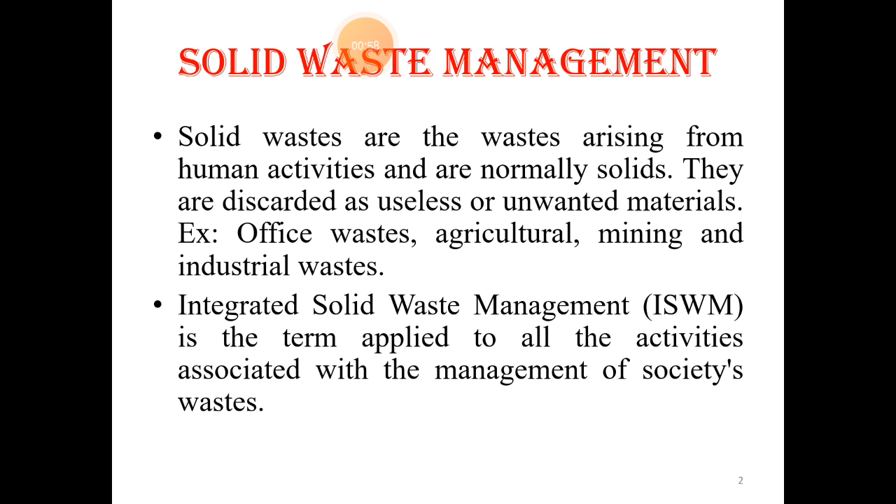In our medieval days, the discarded waste in the streets led to the breeding of vector animals like rats and fleas. This further had led to the arisal of around 22 human diseases, soil and water pollutions as well. This is a nuisance and a great threat to human life.

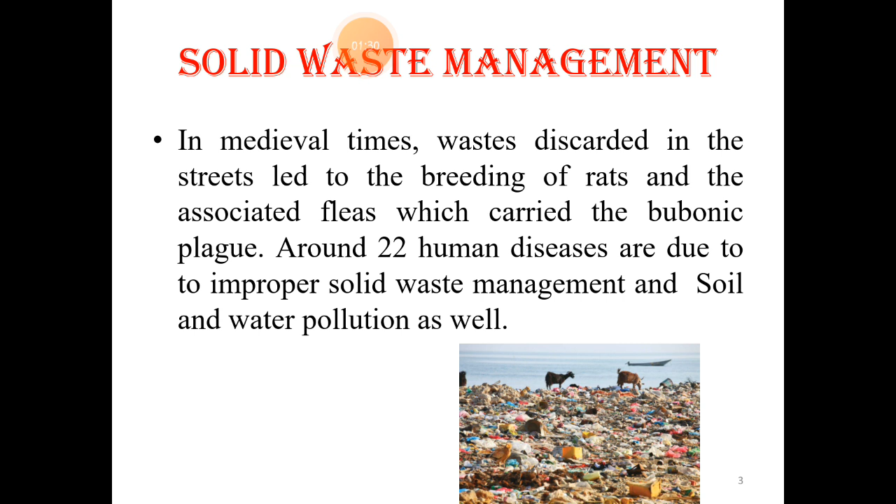Coming on to the sources of this solid waste. As we know, human activities at various places are the chief sources for the generation of solid waste. It includes domestic or residential sources such as food waste, paper waste, garden trimming, glass, waste oil, empty containers, etc.

These wastes are combustible or non-combustible. The next type of sources are commercial waste. It includes waste generated at commercial places like stores, restaurants, hotels, and even in industries.

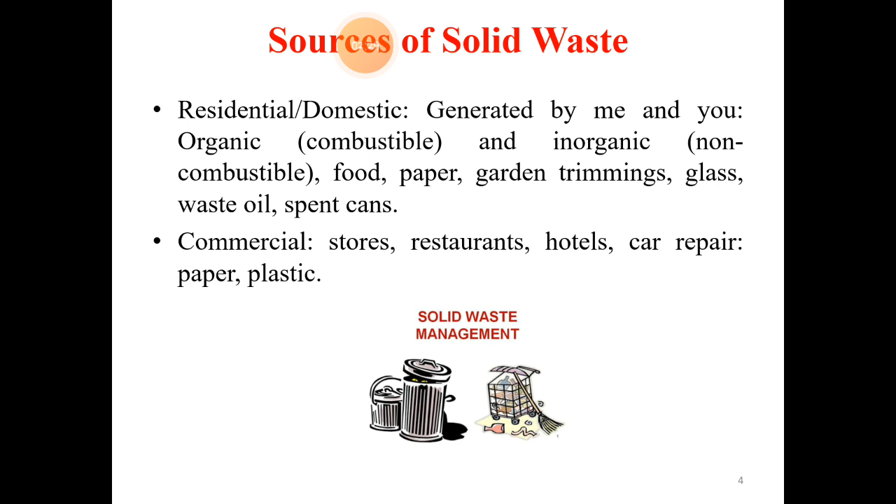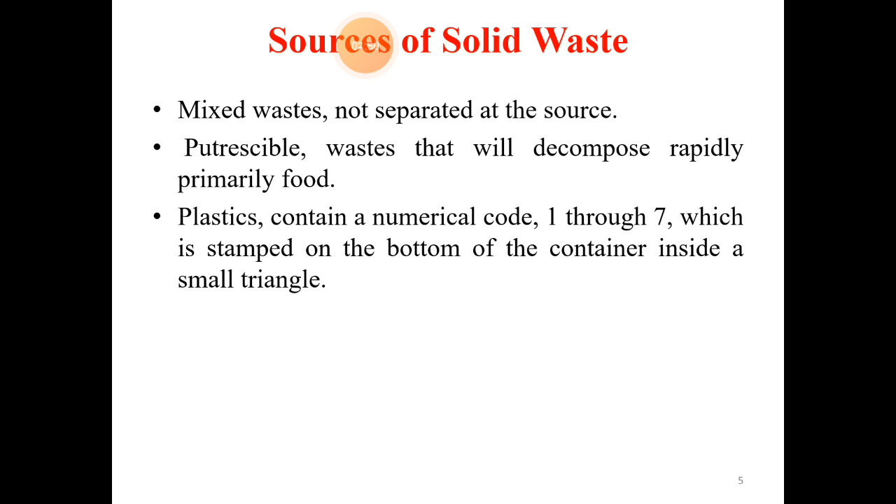The other type of solid waste include mixed waste that are not separated, putrescible waste that include food waste that are decomposable, etc. Industrial waste includes waste generated by the government buildings, industries, and institutional waste includes schools, hospitals, etc.

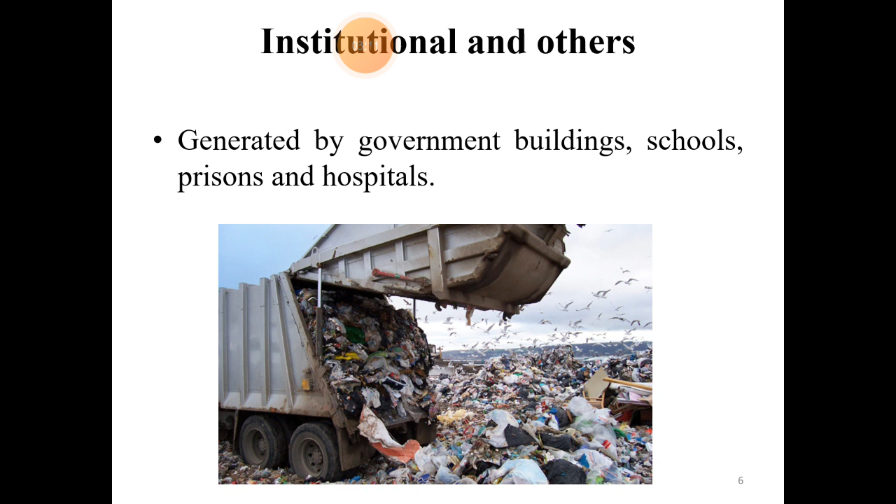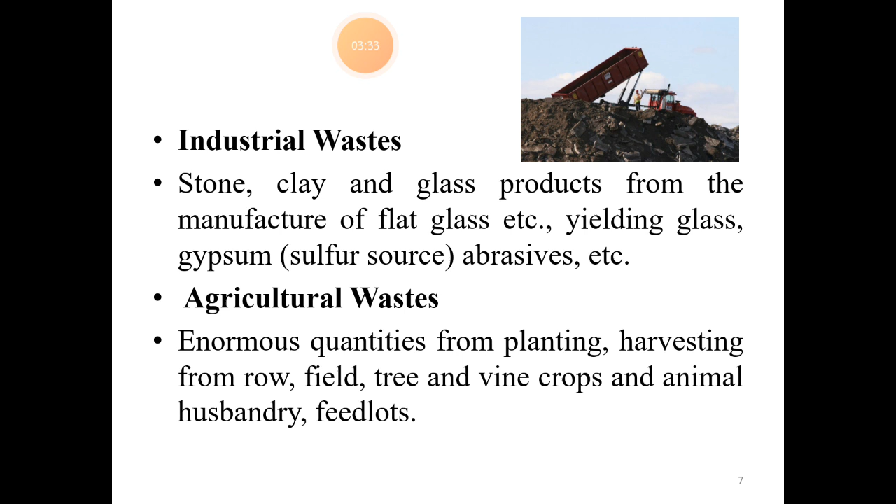The industrial waste includes stones, clay, glass products, paints, etc. Whereas the agricultural waste includes waste of the plantlets, harvest waste, then animal waste, etc.

So, the definition of solid waste management or garbage management is a scientific method of collection, transport, and processing or disposal and management of the solid waste.

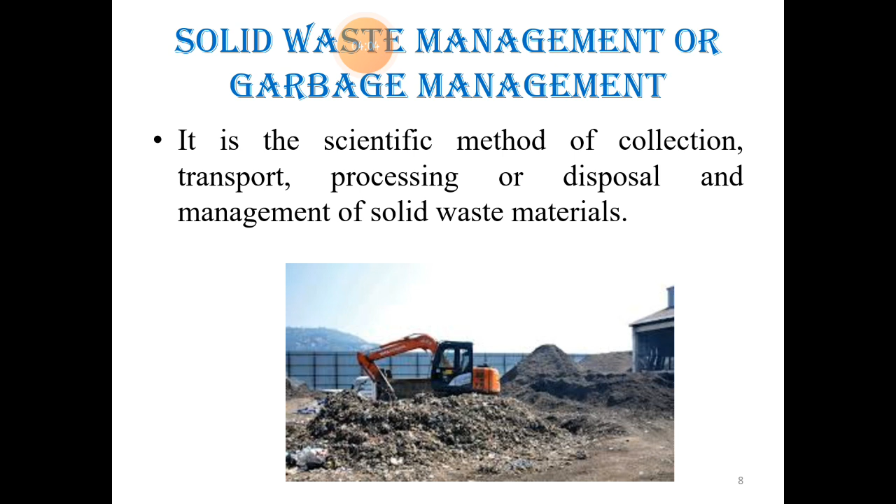Solid waste management majorly includes three scientific methods and stages. Number one, collection and transport of the waste. Number two, disposal methods. And number three, recovery stages. Students, remember, solid waste management is a scientific method where we collect the waste, transport the waste, dispose the waste, and recover the energy and resources from it.

We shall understand one by one now. Step one is collection of solid waste. It includes picking up of solid waste from the sources, handling and emptying of truck that carries solid waste from the sources.

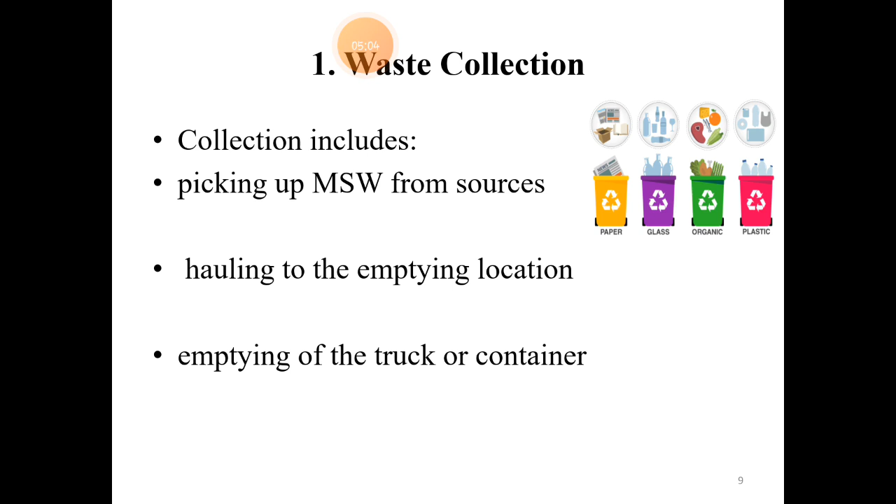Sources of solid waste include curbs, alleys, and backyards. Curbs include manual or mechanical collection and the storage of waste. Alleys refer to narrow passage between the buildings and the waste of such passage, we call it alleys waste. Then backyard includes collector of garbages which is emptied from the location and set the containers back at its place.

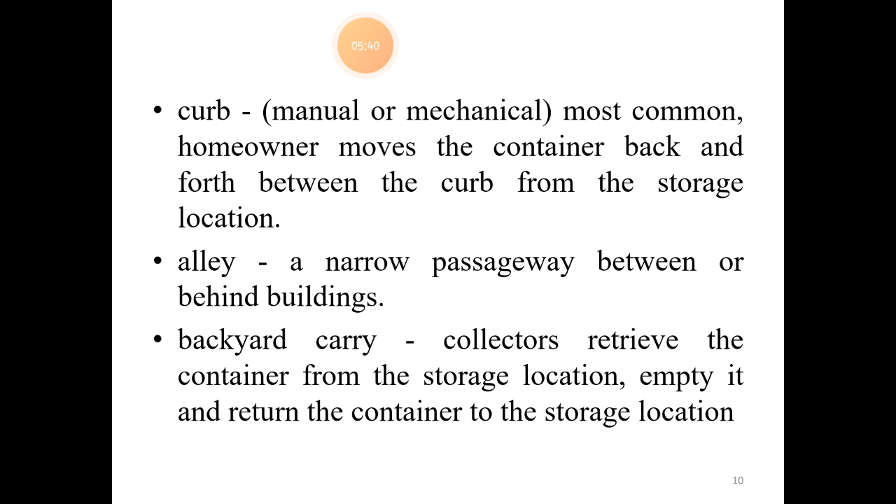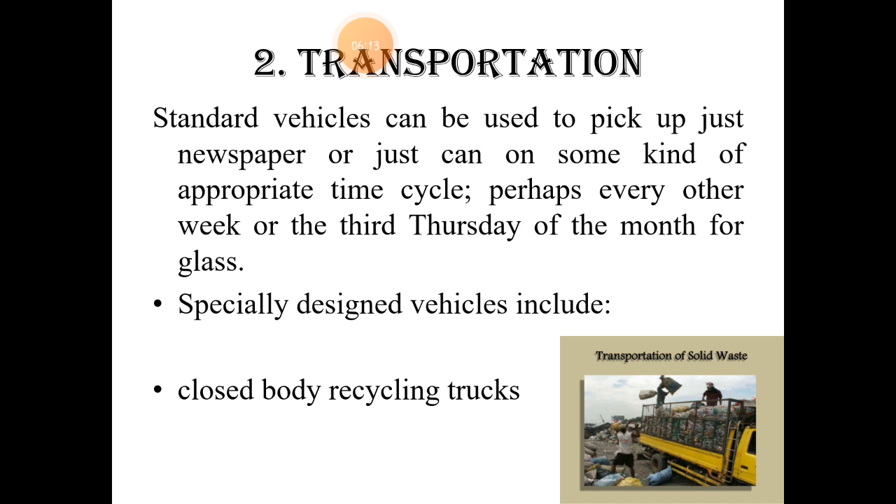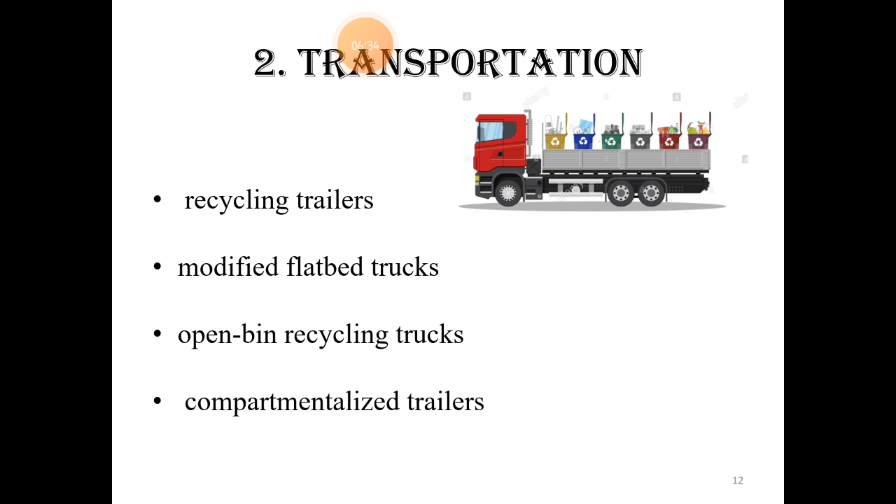The next step of solid waste management is transportation. In this stage, standard vehicles are used to carry the waste from the source of generation of waste. The vehicles may be closed body recycling trucks that avoid the spillage of waste on the roads, then recycling trailers, flatbed trucks, open recycling trucks, and compartmentalized trailers that carry the garbage without any spillage.

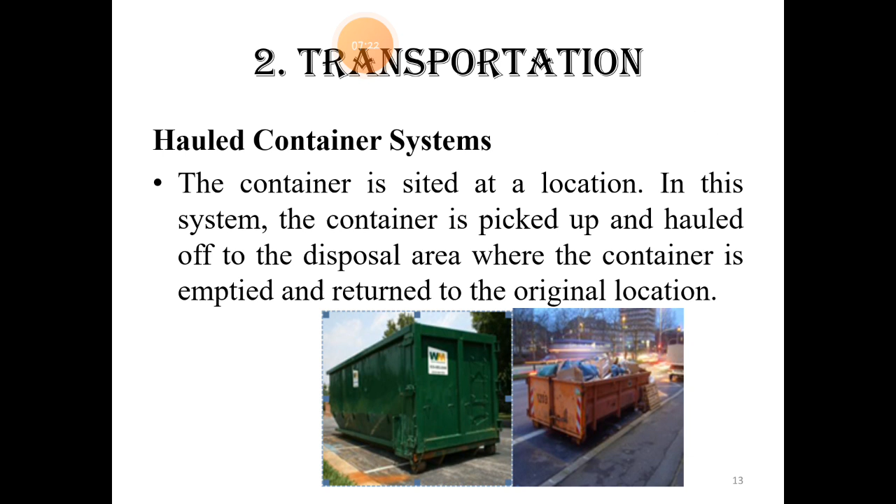The advantages of hauled container system includes: number one, high rate of collection of waste; number two, it eliminates the spillage of waste in the containers; number three, it is a flexible method. Coming on to the disadvantage of hauled container system, that includes low utilization of this technology.

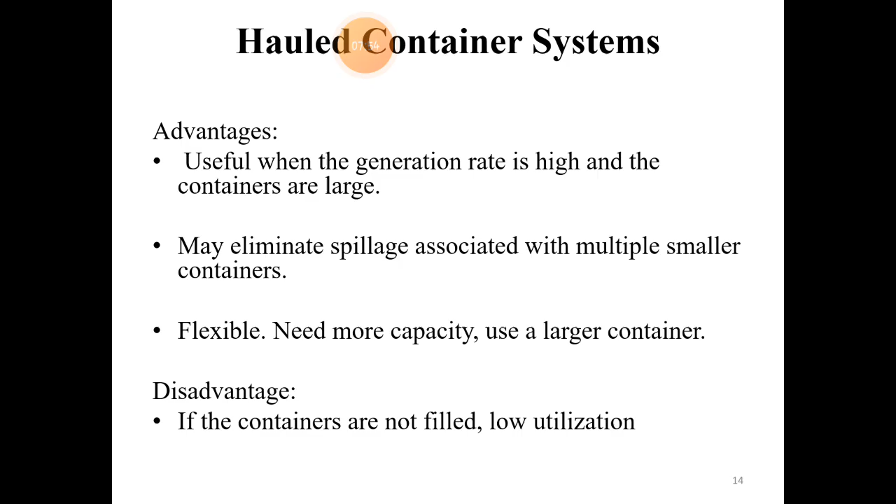The next stage of solid waste management is disposal methods. First is collection of waste, second is transportation of waste, third step is disposal methods. It includes the scientific method of disposal of segregated waste. You all may be aware of various colored trash cans or dustbins which are used to collect and dispose the solid waste.

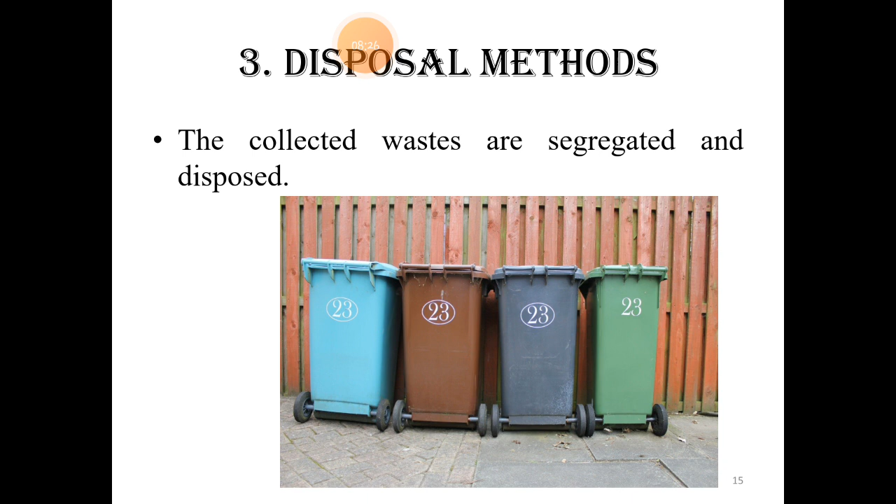The disposal method includes number one, open dumping method. It is an unscientific traditional method of solid waste disposal. The waste is dumped openly in certain selected areas and it is a widely used, inexpensive and conventional method. It simply refers to throwing of the waste wherever we want in an open place.

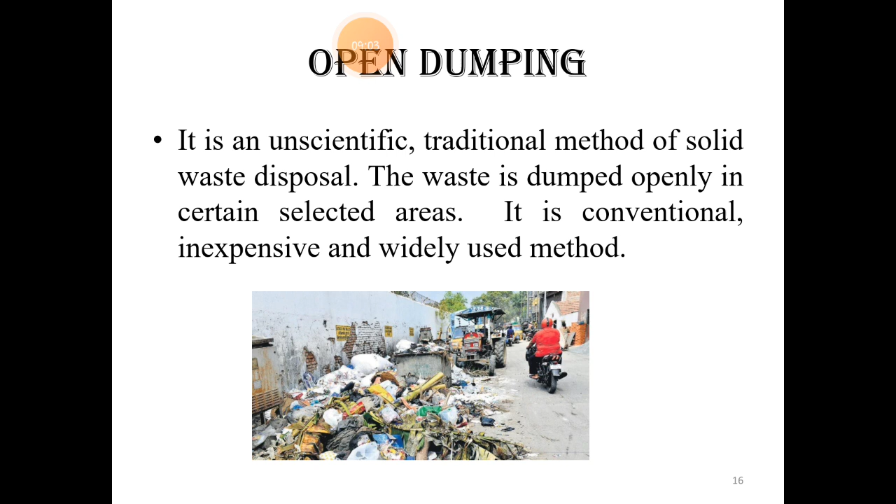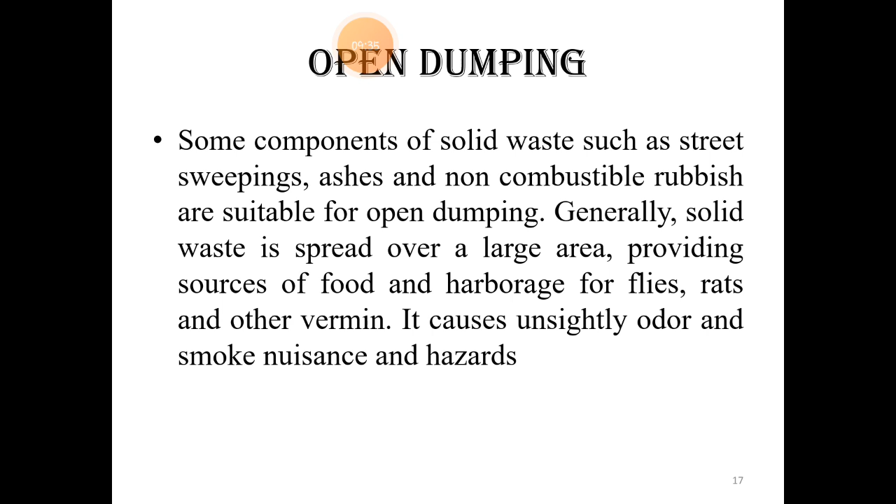The open dumping waste includes street sweepings, ashes, non-combustible rubbish, etc. Thus, it spreads over a large area and provides harborage for many vector insects, rats, and other disease-causing vermin. It causes a nuisance and hazardous odor affecting the health of the people of the surrounding.

The advantage of open dumping method is it includes all kinds of solid waste, causes less health related problems, and needs less labor and supervision also.

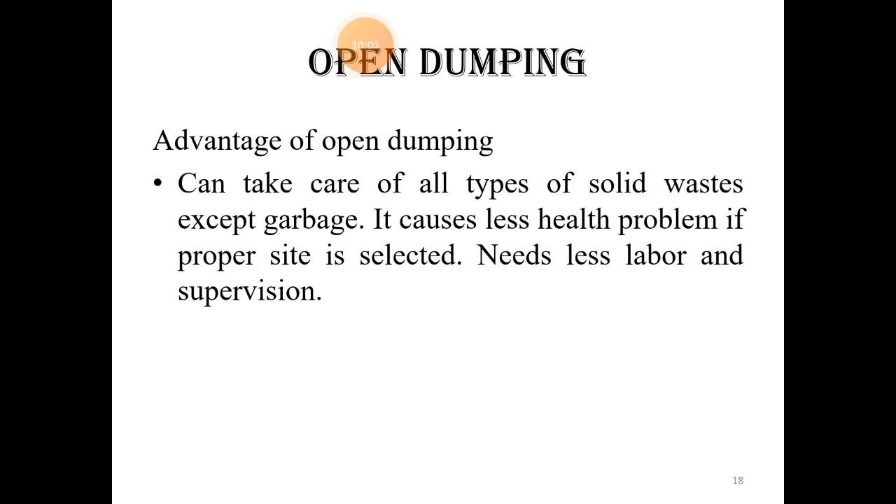Coming on to the disadvantages of open dumping method, it includes attraction of vector flies like mosquitoes, house flies, rats and dogs, etc., that spread diseases. It becomes a site for breeding of these animals and insects. It causes air pollution, land pollution, affecting the health of surrounding human beings and even animals.

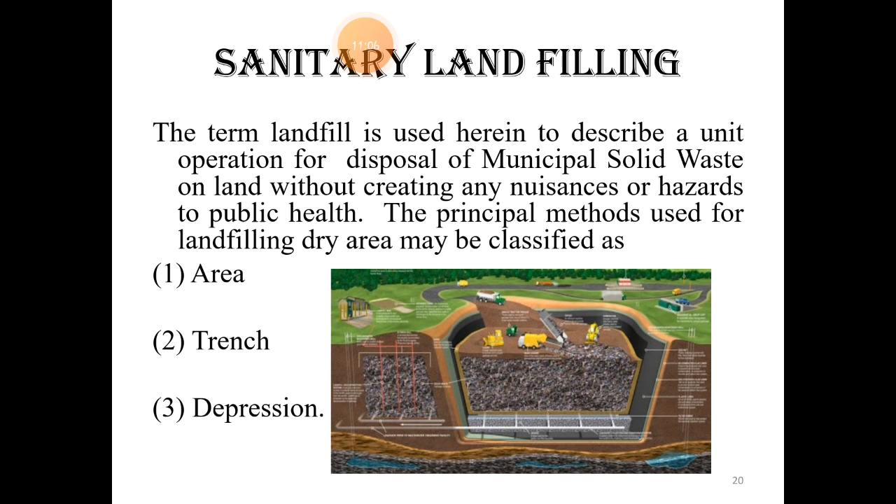The next disposal method is sanitary landfilling. It is a scientific method of disposal of solid waste on land without creating any nuisance or hazards to public health. The site of disposal includes any dry area or even a trench or depressed land. These are pre-planned sites where the waste is dumped and compacted by a rolling process using bulldozers.

The waste is first collected, then compacted using bulldozers. After compaction, a layer of earth or soil, called a blanket, is added or covered over the garbage every day. The blanket simply refers to a cover over the waste, and it includes materials like chipped wood and chemically fixed bio-solids, etc.

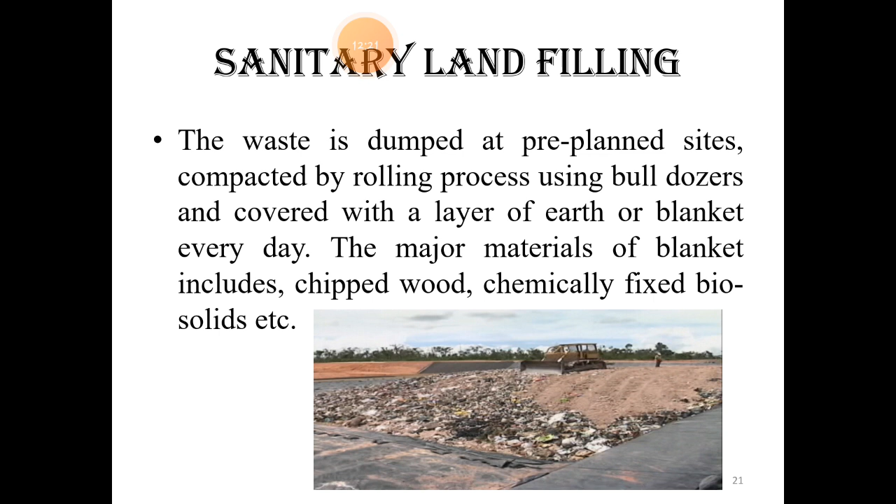Students, in the picture on the slide, you can see the sanitary landfill method, where bulldozers and trucks are used to compact the waste, over which a layer of soil or earth is added, acting as a blanket. The waste compacted on a daily basis, along with the blanket cover of soil, is called a daily cell. A pictorial representation of the daily cell is seen in the picture on the slide.

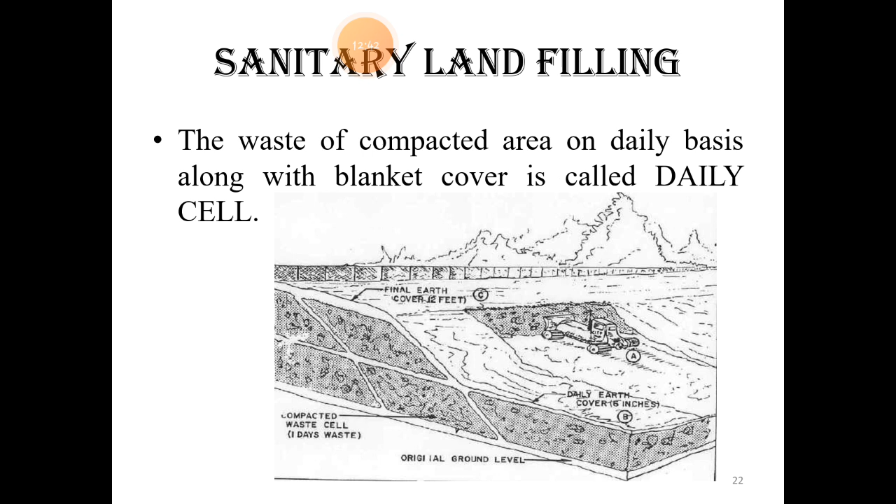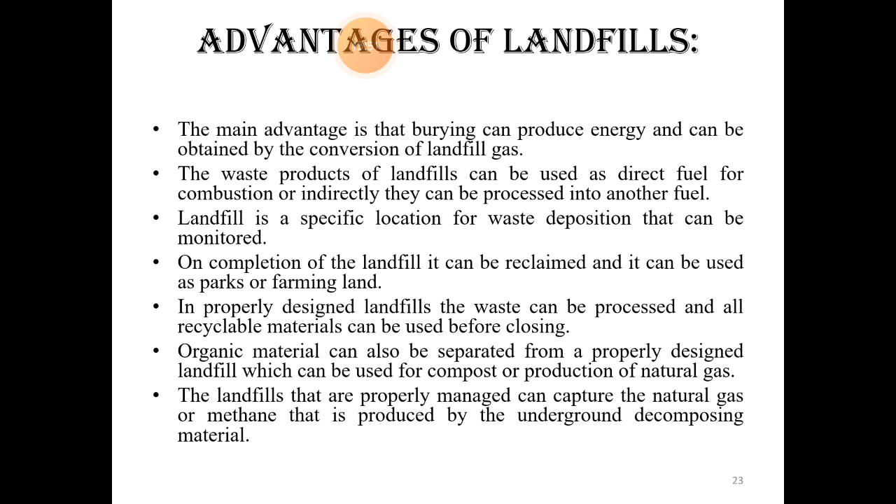Coming on to the advantages of landfills: the burial of solid waste can produce energy, thus converting landfill gas. The waste products are converted into another usable form of energy. Since landfills are at pre-planned specific sites, they are easy to monitor. Landfill sites can be used as parks or farming lands in the future. The recyclable materials from landfill areas, along with organic waste materials, are separated and used for compost production. The natural biofuel gas like methane is also produced by these landfill sites.

Coming on to the disadvantages of landfills: poor operation strategies pollute the environment heavily, like air, water, and soil. Hazardous chemicals leach into neighboring areas and affect the groundwater system. It also causes the nuisance of insects and rodents, which becomes a causative factor for disease outbreaks.

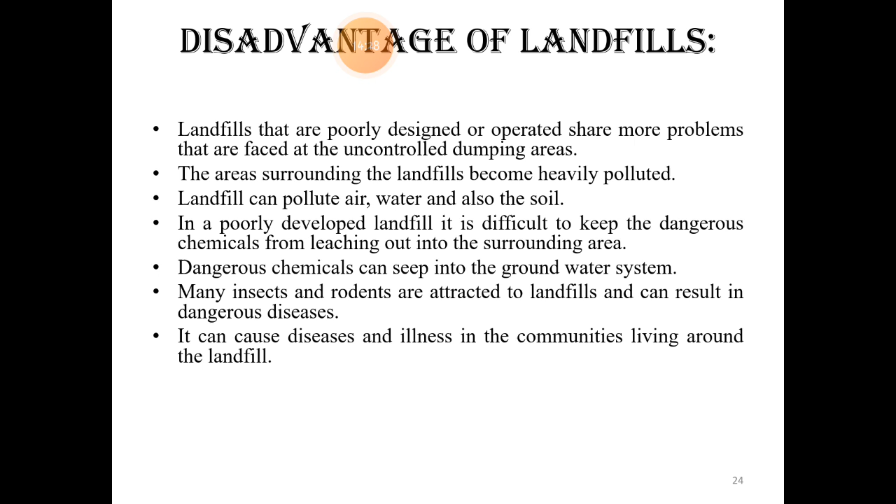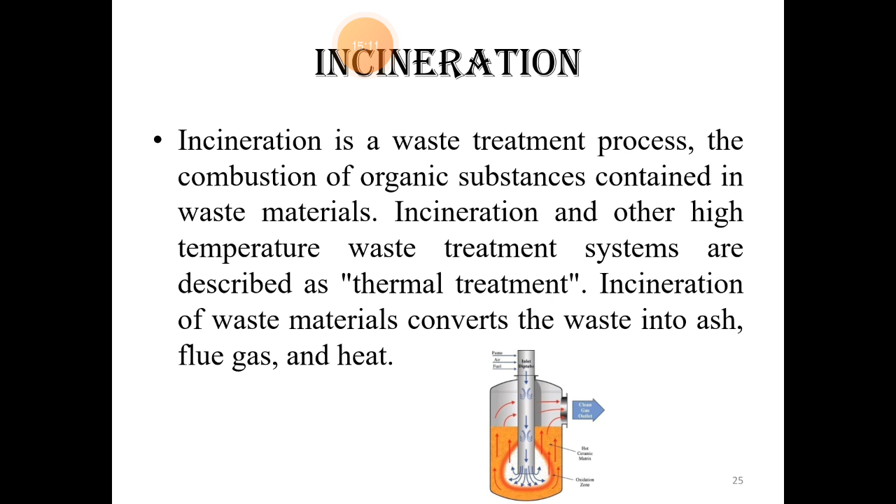The next method of disposal is incineration. Incineration is a waste treatment process wherein the combustion or burning of organic waste materials is done in a closed system, hence it is also called a thermal treatment process. Here, the waste materials are converted into ashes, gases, or even heat energy. Down the slide, here is a picture of an incinerator system.

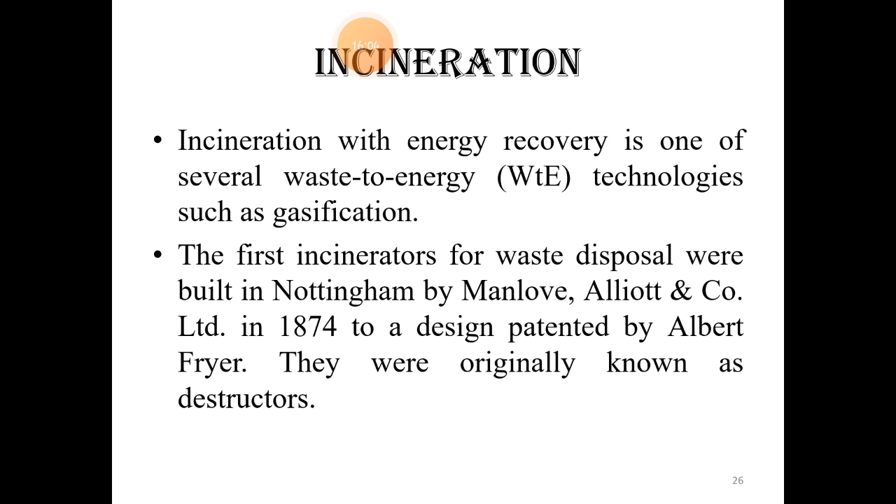Incineration is also an energy recovery process where waste is converted into energy, called WtE technology. Especially hot gases are produced in this technology that are used for the generation of electricity by turning turbines. The first incinerator for waste disposal was built in Nottingham in 1874 by Albert Fryer. Originally, these incinerators were called destructors. The incinerator has an outer metal barrel with an exhaust outlet.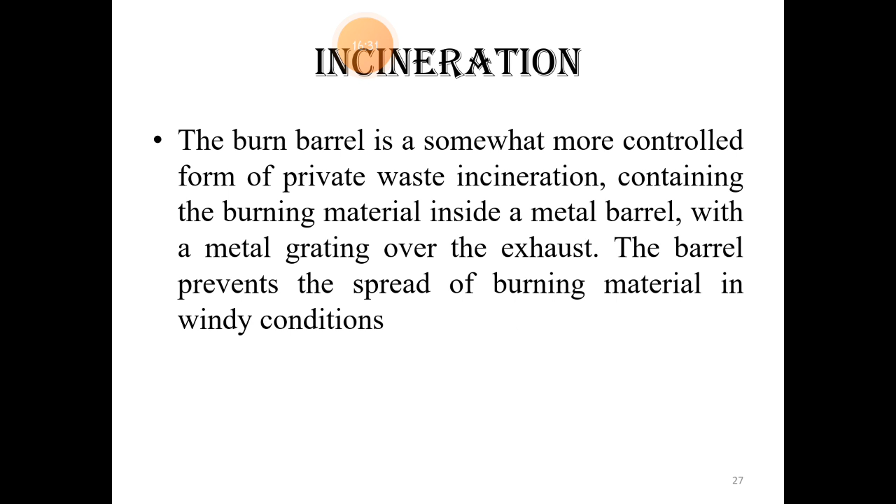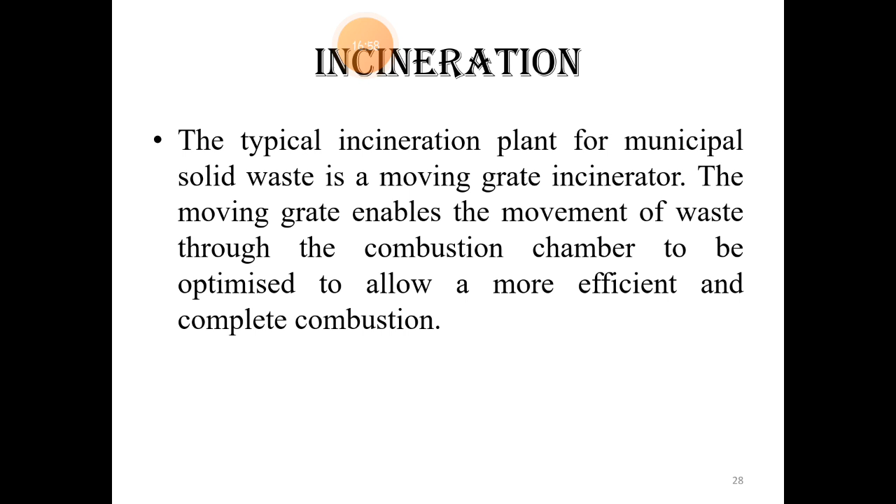The material, like the metal barrel, will prevent the spread of burning materials within the incinerator. There is another type of incinerator called a moving grate incinerator, which enables the movement of the waste while it burns within the incinerator system. This allows more efficient and complete combustion of the waste, so the energy obtained from it is complete.

There is another incinerator type called a rotary kiln, which is used in large industrial plants. It basically has two chambers, called the primary chamber and secondary chamber. The primary chamber converts the solid waste into gases, whereas in the secondary chamber, the gases are subjected to a combustion reaction, which is further utilized for the generation of electricity.

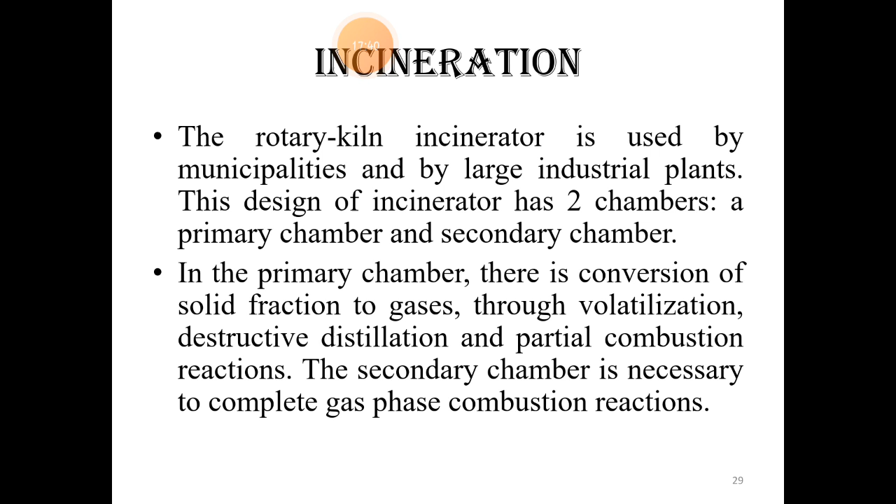The next disposal method and energy recovery phase is called pyrolysis. It is also a heat treatment method where solid wastes are heated at a very high temperature but in the absence of air in a closed system. Generally, 500 to 1000 degrees centigrade of heat is utilized.

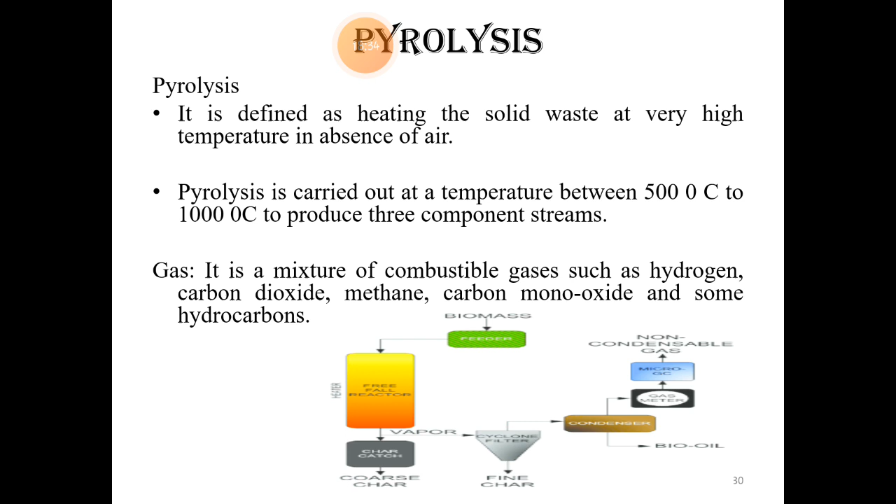The byproducts of pyrolysis may be a gas, a liquid, or even a char. Gas is a mixture of hydrogen, carbon dioxide, methane, and carbon monoxide. Liquid includes light oil, sometimes semi-solid tar, acids, alcohols, etc. Char is an inert material left after the complete burning of a carbon-based compound.

Students, to cite an example here, if we burn a cloth made up of either nylon or plastic, whatever is left over after the complete burning of this material is called char.

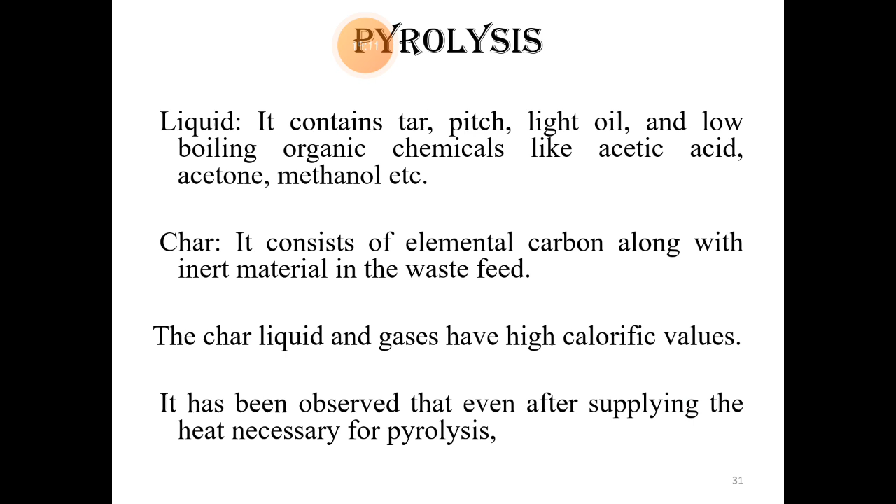The next method of disposal and recovery stage is composting. Composting is an excellent method of recycling waste that is biodegradable. This biodegradable waste includes organic matter waste such as leftover or waste food, yard waste, animal waste, etc. These wastes are decomposed into a fine soil-like nutrient material commonly called humus.

It is done by the help of microorganisms. This humus soil is a nutrient-rich soil used as manure for gardening purposes. The process of composting is technically defined as a process in which organic waste matter is decomposed and converted into mineral-rich humus.

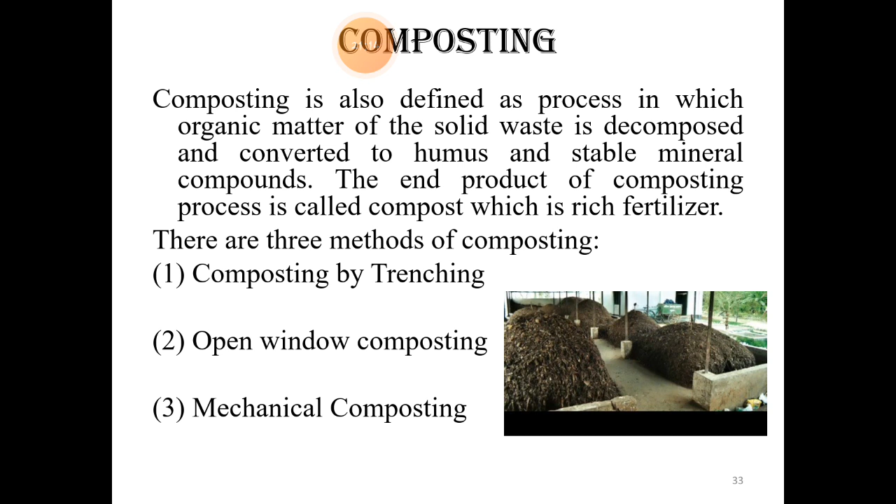As the concept of composting is important for short notes, we shall understand in detail the composting methods. The first method to start is composting by trenching. In this method, trenches of 3 to 12 meters long, 2 to 3 meters wide, and 1 to 2 meters deep were made with a space of 2 meters in between.

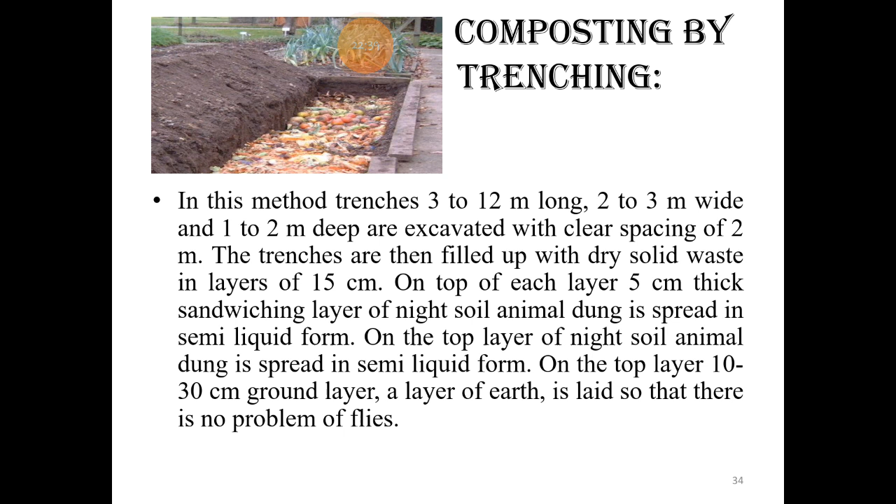Later, these trenches were filled with dry solid waste which is biodegradable, with a 15 centimeter thick layer, upon which around 5 centimeters thick night soil and animal dung waste is spread in the form of slurry or semi-liquid form. On top, a 10 to 30 centimeter thick soil layer is spread to prevent the attack or breeding of flies. Here in the picture we can see a setup of composting by the trenching method.

The setup of these trenches is left for about 2 to 3 days, during which the organic matter gets decomposed by the help of microorganisms. During natural decomposition, heat is generated that reaches a temperature of 75 degrees centigrade. This temperature generally stops the breeding of vector flies. The complete setup is left undisturbed for about 4 to 6 months.

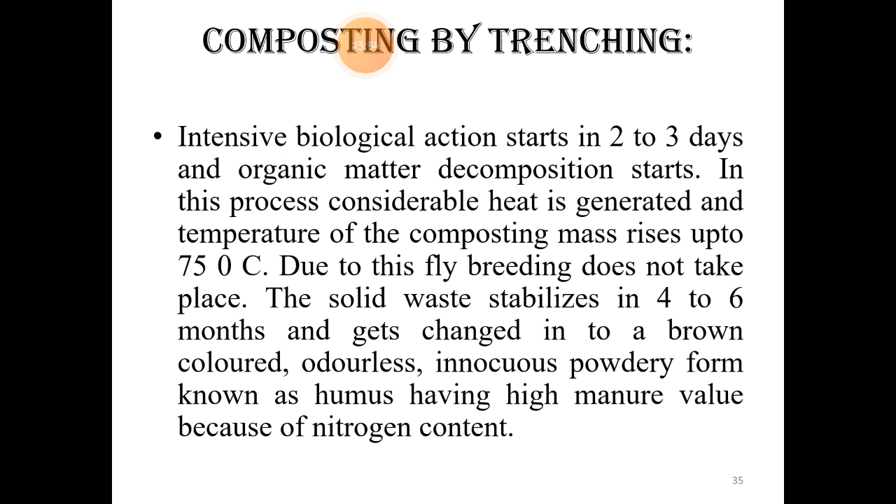Thus, the microbial action on the organic matter gets activated, which changes the waste into a brown colored, odorless, powdery soil called humus or compost, which has a high nitrogen content, making it good to use as a valuable natural fertilizer.

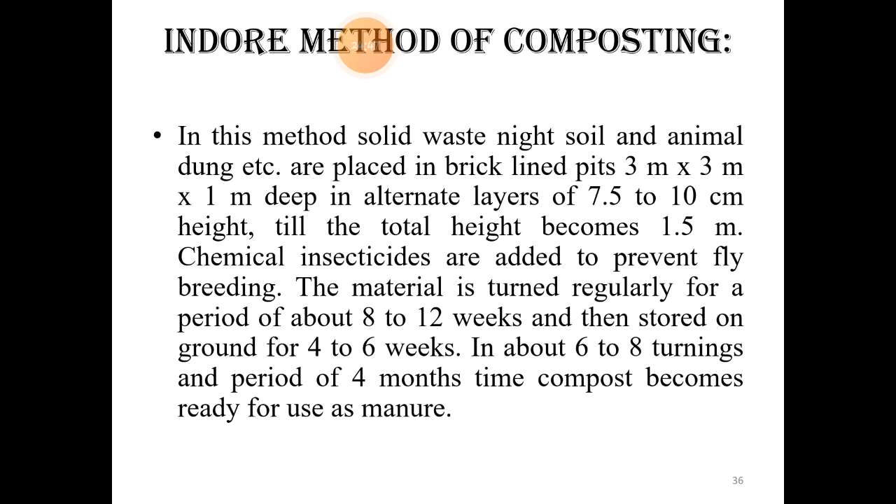The same trenching compost technique is also used for the Indore method of composting. In this method, a brick-lined pit of 3 meters long, 3 meters wide, and 1 meter deep is made. These trenches or tanks are filled with organic solid waste to a 10 centimeter height, alternated with soil and animal dung waste. The system is left for a few weeks. Later, between 8 to 12 weeks, the material is turned so as to get the complete compost.

The second method of composting is the open window composting method. In this method, non-degradable waste like glass pieces, stones, plastics, etc. are first removed or separated, and the leftover organic waste is then piled to 1 meter height. These piles are later covered with soil, animal dung, etc.

This is done for the biodegradation process to get the humus. So here the waste is just dumped and piled, over which a layer of soil and animal dung is utilized as a cover. In this method also, microbial degradation of organic waste takes place under alternating aerobic and anaerobic conditions.

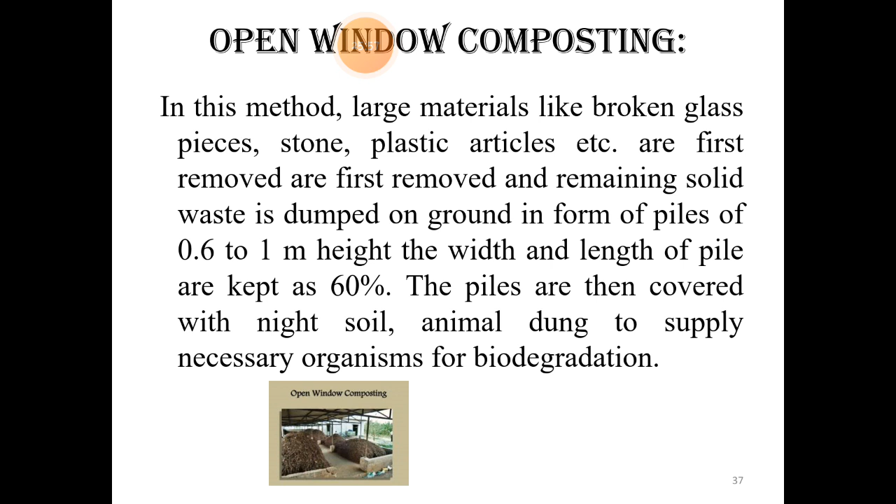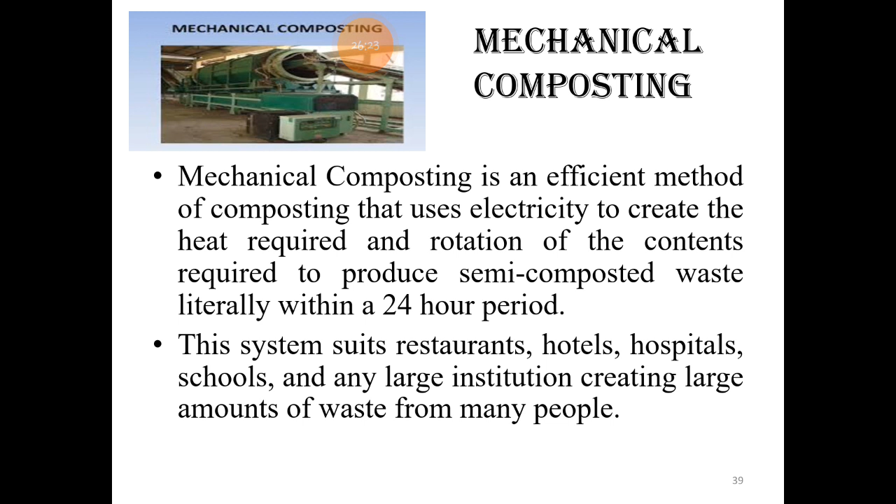The next method of composting is the mechanical composting method. It is an efficient method where electricity is used to create the heat required for decomposition. It is widely used to degrade the waste of restaurants, hotels, hospitals, schools, etc.

Coming to the benefits of composting: number one, it reduces the pollution caused by organic solid waste, so landfills get reduced. It provides nutrient-rich humus soil obtained by a natural process. It increases beneficial soil microbes and organisms.

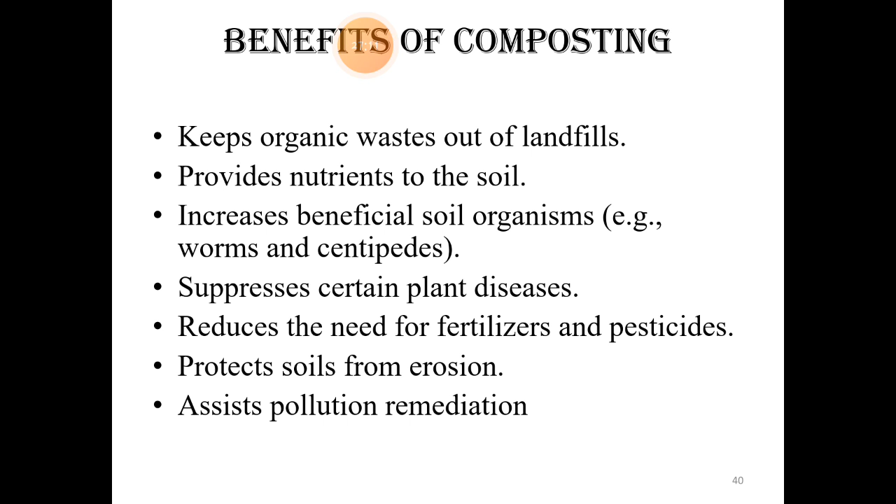It suppresses plant diseases. It reduces the usage of chemical fertilizers and pesticides. It protects the soil from erosion and assists in pollution remediation.

Students, in place of soil microbes, if we use earthworms in the process of composting, then this process is called vermicomposting. Why are only earthworms widely used in this technology? It is because of the biology of earthworms. As we know, earthworms are the farmer's friends.

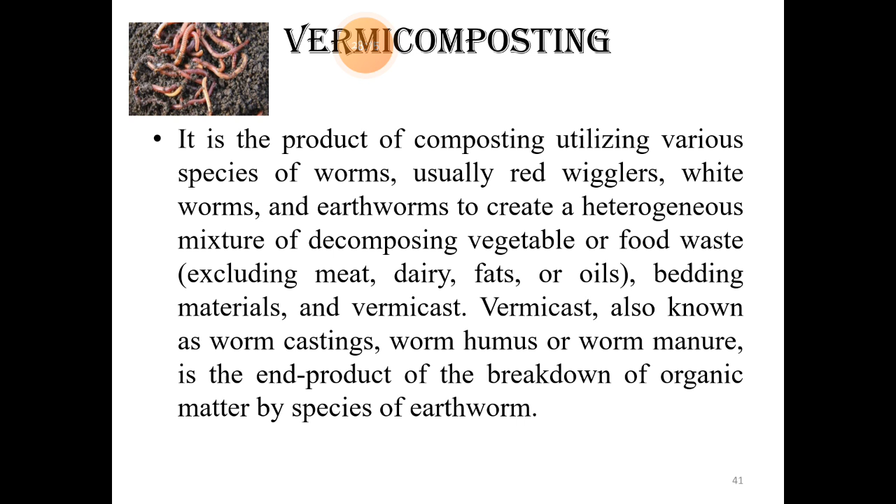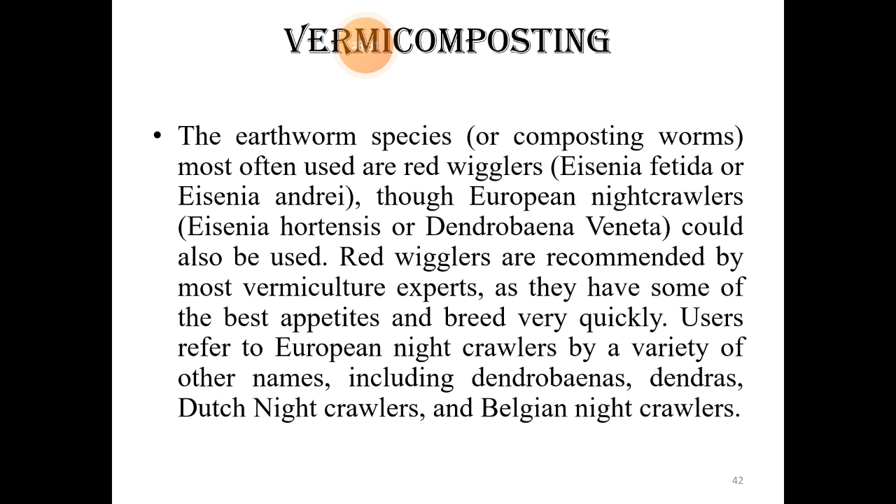They feed on large soil particles and organic waste, converting them into their excretory waste called vermicastings. These vermicasts are soft nutrient soil or worm manure. For vermicomposting, earthworm species of Eisenia or Dendrobaena are widely used because of their voracious feeding habits.

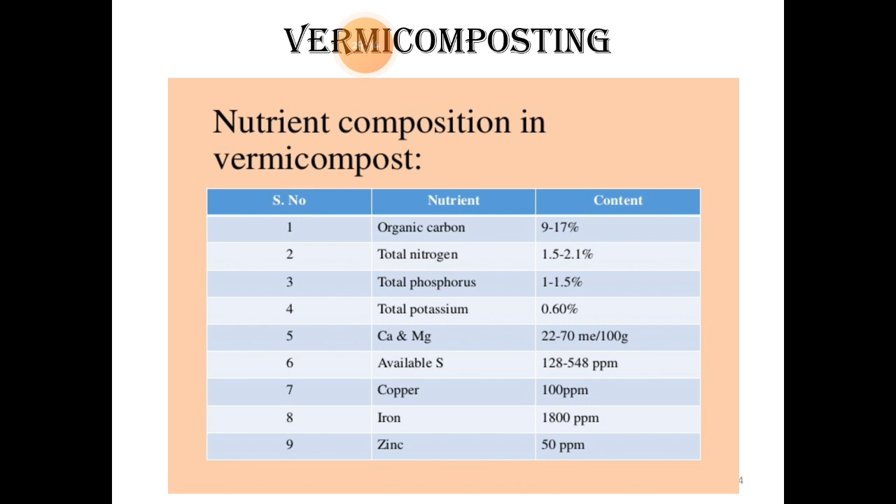The vermicompost is a nutrient-rich organic fertilizer that can be easily absorbed by plants as it has beneficial microbes in it. The composition of vermicompost commonly includes organic carbon of 9 to 17%, nitrogen of 2%, phosphorus of 1.5%, potassium of 0.6%, along with calcium, magnesium, sulfur, copper, iron, and zinc in parts per million.

After understanding the collection and transport of solid waste, that is step 1, and disposal methods, that is step 2, the third step that we shall understand now is the recovery stage of solid waste management.

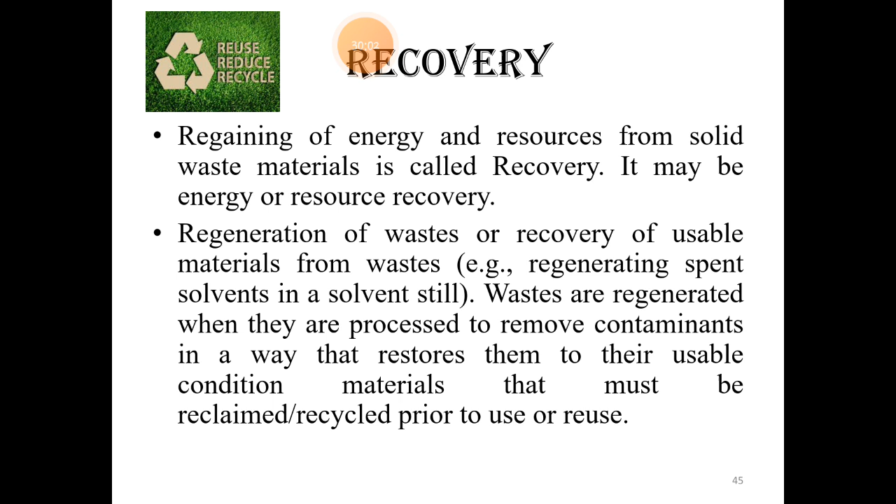Regain of either energy or resources from the solid waste is generally called the recovery stage. Recovery of useful materials from the waste and recycling or reuse of these products is called recovery of resources. It includes the 3R principle or concept of reduction, recycle, and reuse.

Reduction refers to minimum usage of raw materials that will decrease the production of waste itself. For example, reduced demand of any metallic product will decrease the mining of this metal itself.

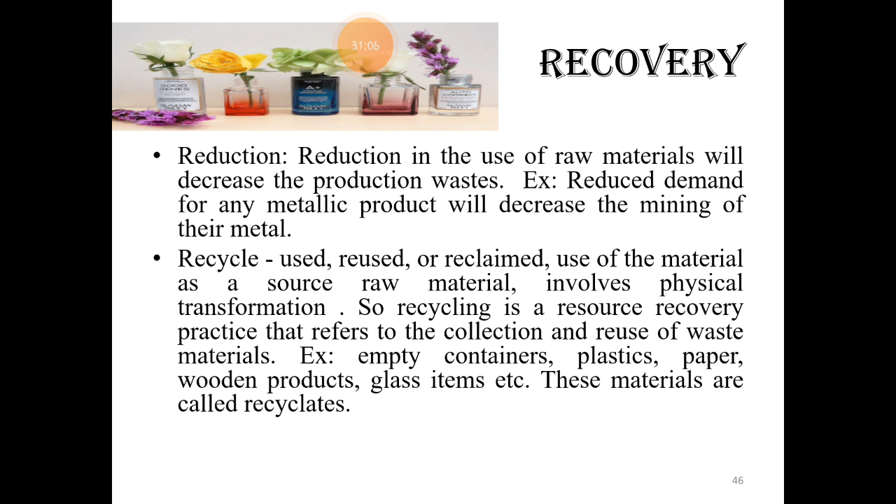The next is the recycle process. It refers to the physical use of the products again, for example recycling of empty plastics, glass containers, papers, wooden products, etc. These materials utilized for the recycle process are generally called recyclates.

According to the recyclates, we have paper recycling, steel recycling, aluminium recycling, glass recycling, plastic recycling, etc. In plastic recycling, the waste plastics are collected first, then later subjected to the compact process.

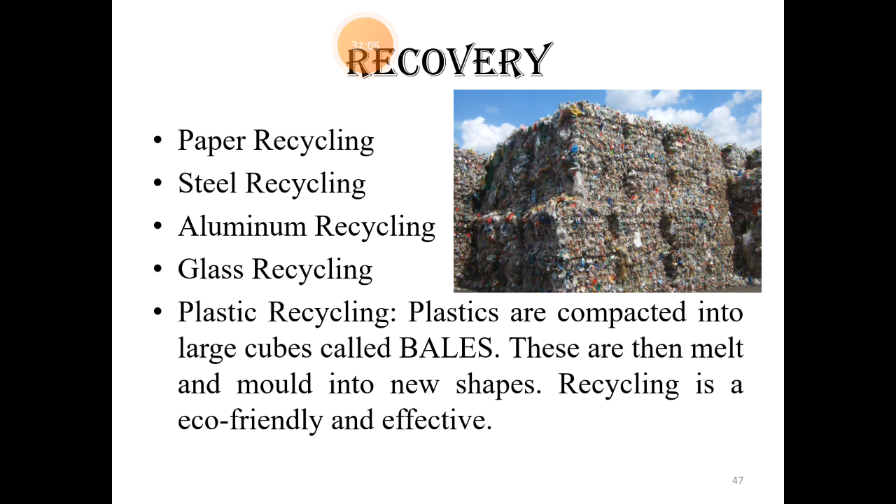The next R stands for reuse. It refers to the reuse of materials in their original form itself instead of throwing them as waste. For example, travel washable mugs, storage bags, and napkins.

Students, we also have learnt about the recovery of energy from the waste, that is E from W. In this concept of disposal, we have learnt about incineration, pyrolysis, composting, vermicomposting, etc. They are all the different methods, not only of disposal but also of recovery of energy from those waste resources.

So, after understanding the concept of solid waste management, we shall now concentrate on the next subtopic under the chapter, which is ecological sanitation, or in short ECOSAN. It is also called ecological composting, composting toilets, or ecological toilets. These are all the different synonym names given for the ecological sanitation process. ECOSAN, in short, is an environment-friendly, sustainable sanitation system.

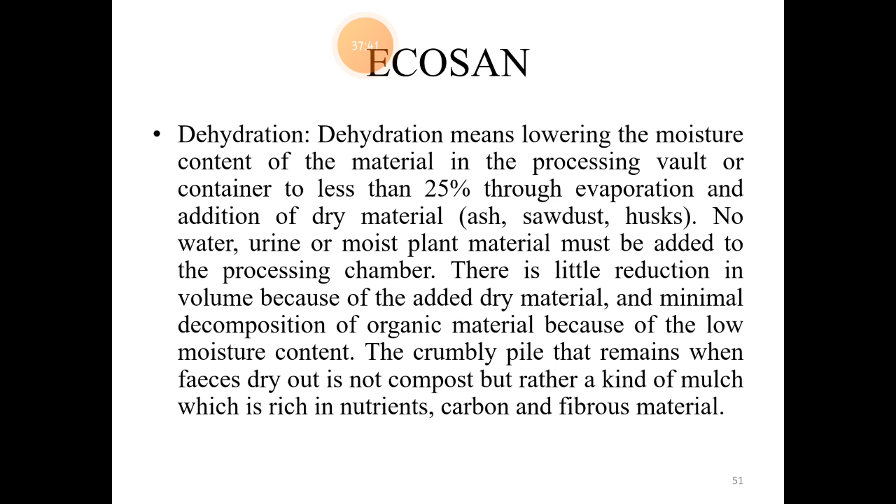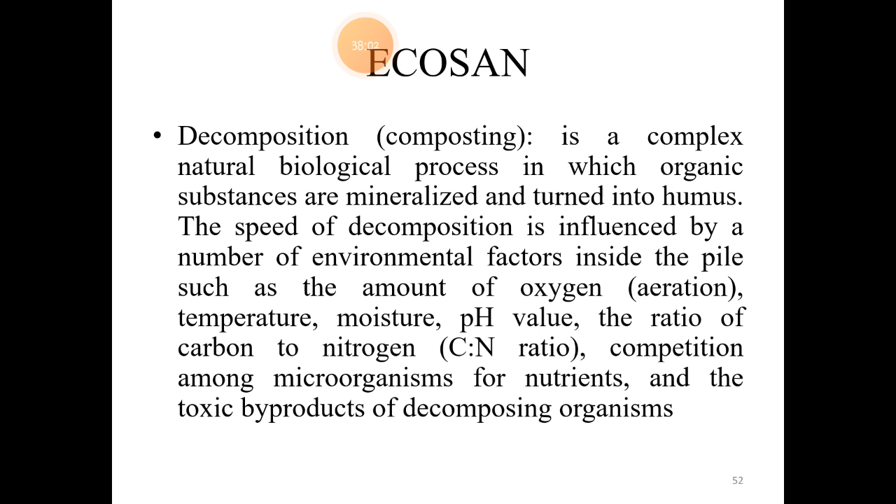The next stage of ECOSAN is composting or decomposition stage. In this stage, the organic human waste gets converted into mineralized humus by the use of microorganisms. They also maintain certain physical and chemical parameters of the soil.

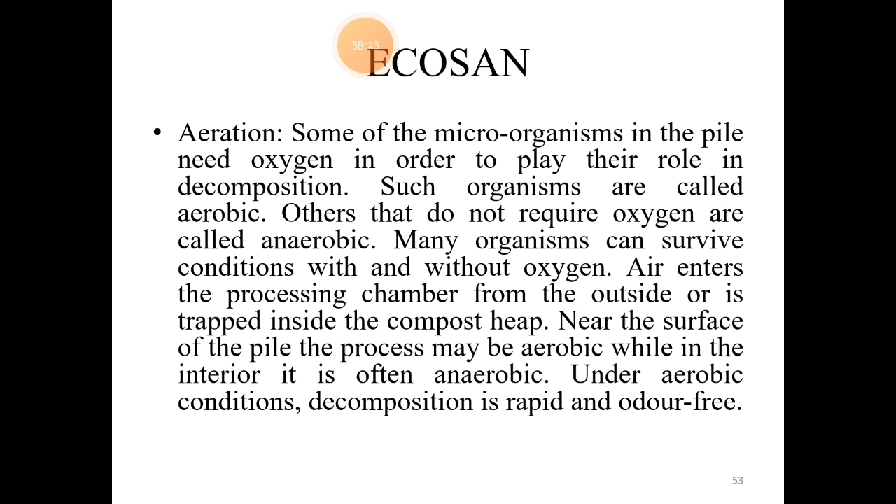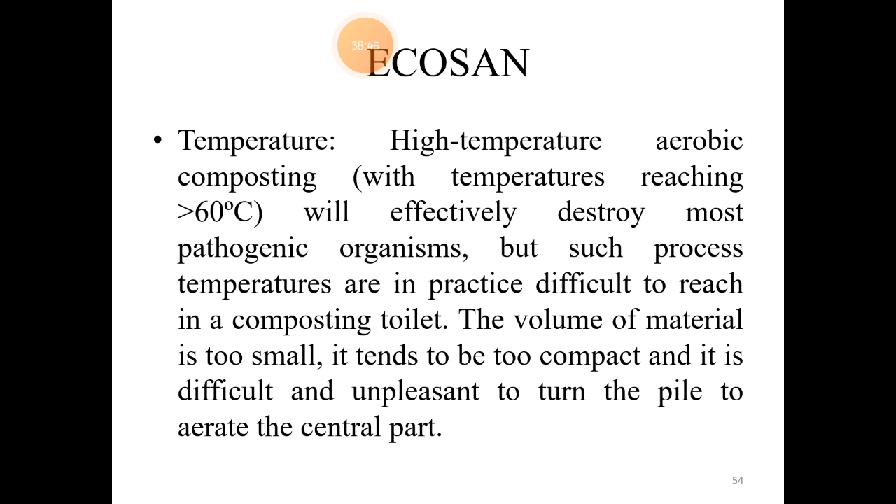With this, we are completing the concept of ecological sanitation and solid waste management. Both the concepts are important for short notes as well as long answer questions.